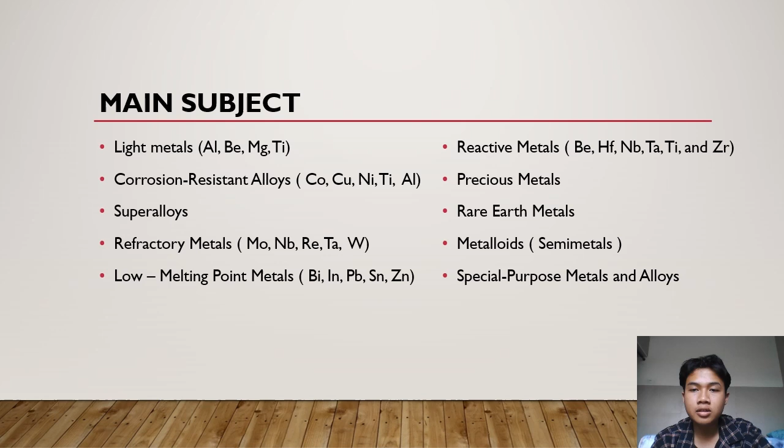So today I want to make a presentation. We will talk about metallurgy. In this chapter we will talk about non-ferrous metal, a variety of possibility. For the book reference, I use Metallurgy for the Non-Metallurgists, the second edition, edited by Arthur C. Reardon. For this main subject, we will talk about light metals, corrosion-resistant alloy, superalloy,

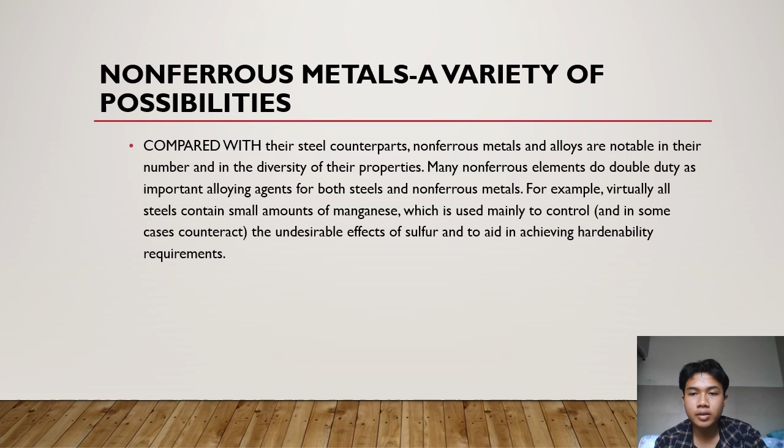refractory metals, low melting point metals, reactive metals, precious metals, rare earth metals, metalloids, and special purpose metal. So we talk about the non-ferrous metal, a variety of possibility. Compared with their steel counterpart, non-ferrous metal and alloy are notable in their number and in the diversity of their properties. Many non-ferrous elements do double duty as important alloying agents for both steel and non-ferrous metals. For example, virtually all steel contains a small amount of manganese, which is used mainly to control and in some cases counteract the undesirable effect of sulfur and to aid in achieving hardenability requirements.

So in the first chapter, we will talk about light metal such as aluminum, beryllium, magnesium, and titanium. High strength, lightweight alloys are of great importance in engineering applications for use in land, sea, air, and space transportation. One kilogram, or 2.2 pounds, of metal saved in the design and construction of such a system can result in important weight saving in power plants, transmission systems, and in total fuel requirement. There is a strong demand for high-strength, lightweight metal and alloy.

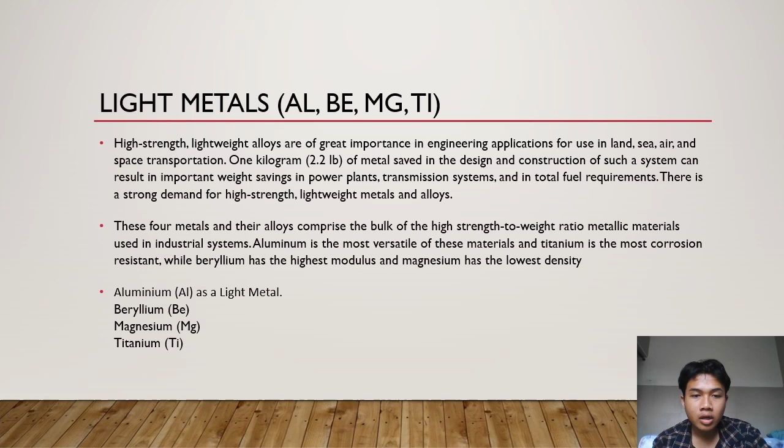So these four metals and their alloys comprise the bulk of the high strength to weight ratio metallic material used in industrial systems. Aluminium is the most versatile of these materials, and titanium is the most corrosion resistant, while beryllium has the highest modulus and magnesium has the lowest density. So these four metals include aluminium as a light metal, beryllium, magnesium, and titanium.

Aluminium has a density of only 2.7 grams per centimeter cubed, or 0.1 pound per inch cubed, resulting in a weight approximately one-third that of the same volume of steel, copper, or brass. Such a lightweight, coupled with the high strength of certain grades of aluminum alloy exceeding the strength of some structural steel, permits the design and construction of strong, lightweight structures. Aerospace structures are a primary example of this.

Beryllium is a high-strength, lightweight metal that is finding increasing use as a structural material in aerospace vehicles. The density of beryllium is only 1.85 grams per centimeter cubed, or 0.066 pound per inch cubed. This low density, coupled with high strength, gives beryllium an outstanding strength to weight ratio. Additionally, beryllium maintains its strength up to a temperature of approximately 1100 Fahrenheit.

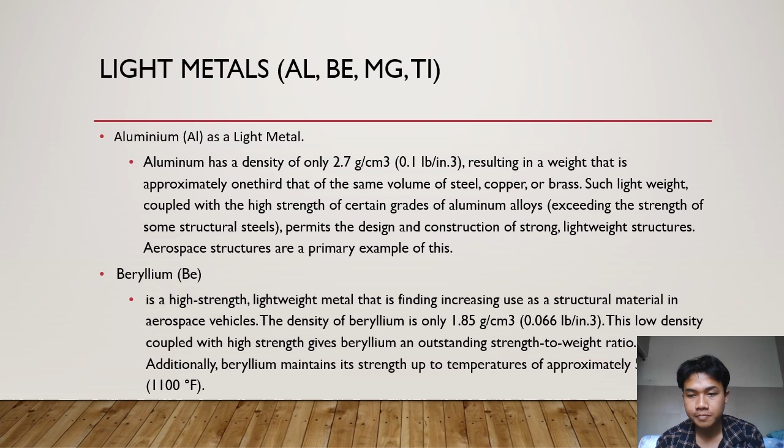So next we will talk about magnesium. It has long been recognized as the lightest structural metal. Structural applications include industrial, material handling, commercial, and aerospace equipment. In industrial machinery such as textile and printing machines, magnesium alloys are used for parts that operate at high speed and thus must be lightweight to minimize inertial force.

Last one is titanium, another low-density element, approximately 60% of the density of steel, that can be readily strengthened by alloying and deformation processing. Like steel, it is allotropic. Historically, titanium alloys have been used instead of iron or nickel alloy in aerospace applications because titanium saves weight in highly loaded components that operate at low to moderately elevated temperature.

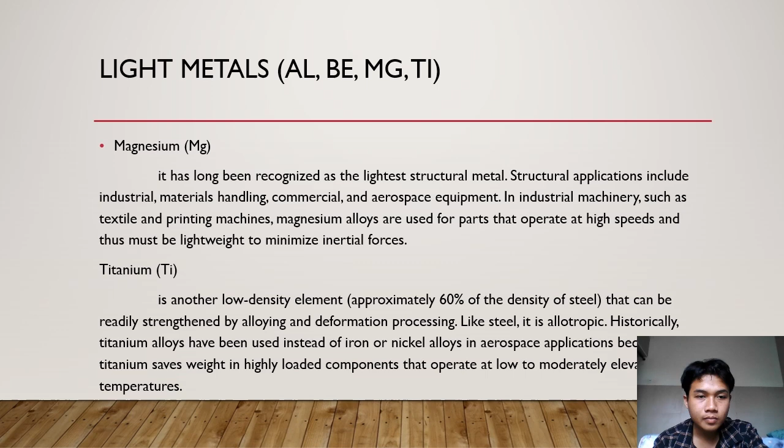So this is the table that has density and elastic modulus of important light metal. As you can see, magnesium has a density of 1.74 and a modulus of elasticity of 44.8. If you compare it with beryllium, it has a density of 1.85 and a modulus of elasticity of 303. So as you can see in this picture, you can compare it by yourself.

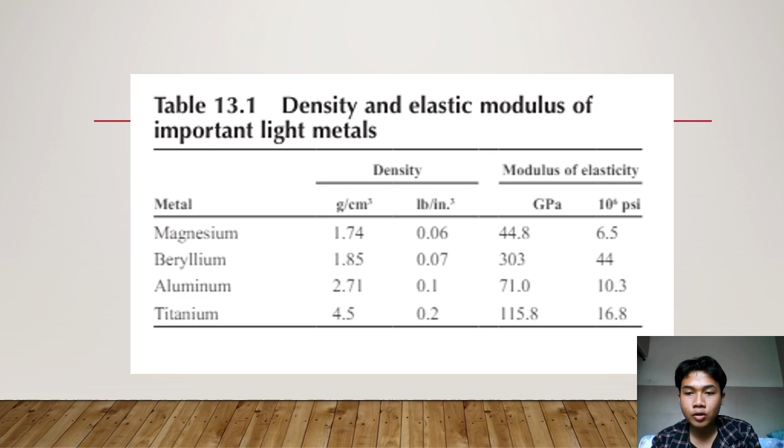Then let's talk about corrosion resistant alloy. Non-ferrous metal and alloy are widely used in corrosive environments. At one end of the spectrum, they are used for water piping and food preparation. At the other end, they are vital to the operation of many chemical plants dealing with aggressive acids and alkalis. There are two main reasons why non-ferrous metal are preferred over steel and stainless steel for many of these applications.

Variety of non-ferrous metals and alloys are well suited to this type of application due to their desirable physical and mechanical properties. For example, a high strength to weight ratio or high thermal and electrical conductivity may provide a distinct advantage over a ferrous alloy. Second, many of the non-ferrous metal and alloy possess much higher resistance to corrosion than available alloy steel and stainless steel grades. Four common non-ferrous metals used for their well-documented corrosion-resistant properties are copper, nickel, titanium, and aluminum.

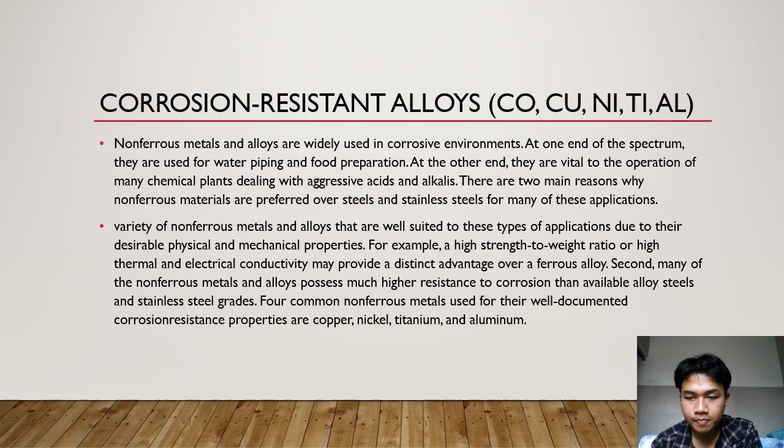We will talk about cobalt.

CoCrW and CoCrMo alloys were first investigated in the early 20th century by Elwood Haynes. He discovered the high strength and stainless nature of binary cobalt-chromium alloy and first patented cobalt-chromium alloy in 1907.

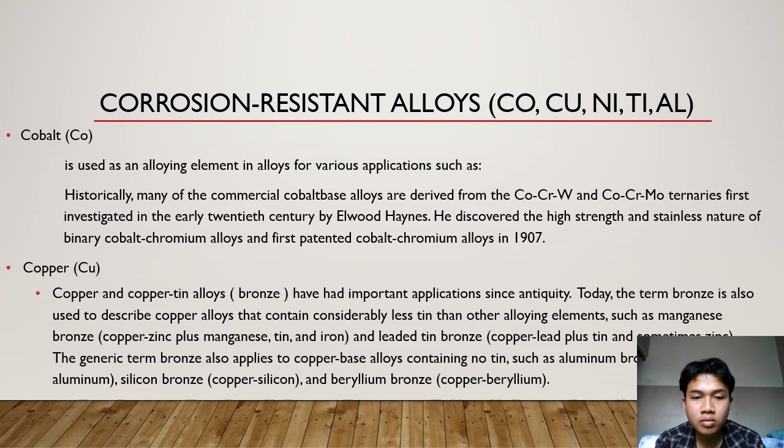Copper and tin alloy, or bronze, has had important applications since antiquity. The term bronze is also used to describe copper alloys that contain considerably less tin than other alloying elements, such as manganese bronze and leaded tin bronze. The generic term bronze also applies to copper-based alloys containing no tin, such as aluminum bronze, silicon bronze, and beryllium bronze.

Corrosion-resistant nickel alloys are very important to industries that deal with aggressive chemicals and high temperature conditions. Many of the nickel alloys designed to resist aqueous corrosion possess higher resistance to hydrochloric acid and chloride-induced phenomena, including pitting, crevice attack, and SCC, than stainless steel.

Nickel alloys are also among the few metallic materials able to cope with hot hydrofluoric acid. Titanium and its alloys are part of a larger family of materials known as reactive metals.

All of these reactive metals, notably titanium, zirconium, niobium, and tantalum, benefit from a highly protective oxide film. As a result, their corrosion rates are extremely low in many environments. The excellent corrosion resistance results from the formation of a very stable, continuous, highly adherent, and protective surface oxide film.

Aluminum is like titanium. Aluminum and its alloys are protected from many potentially corrosive environments by an oxide film that forms readily on freshly exposed surfaces. Aluminum has high resistance to corrosion in atmospheric environments, and in many industries, aluminum has especially good resistance to corrosion by weathering, due in large part to the formation of...

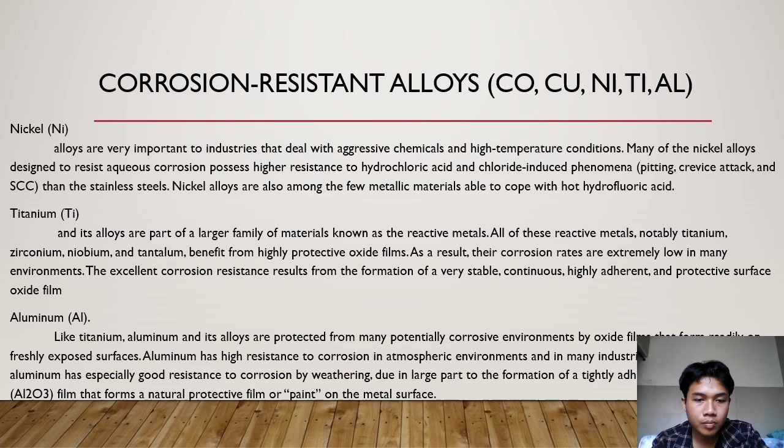...an aluminum oxide, Al2O3, film that forms a natural protective film or coating on the metal surface.

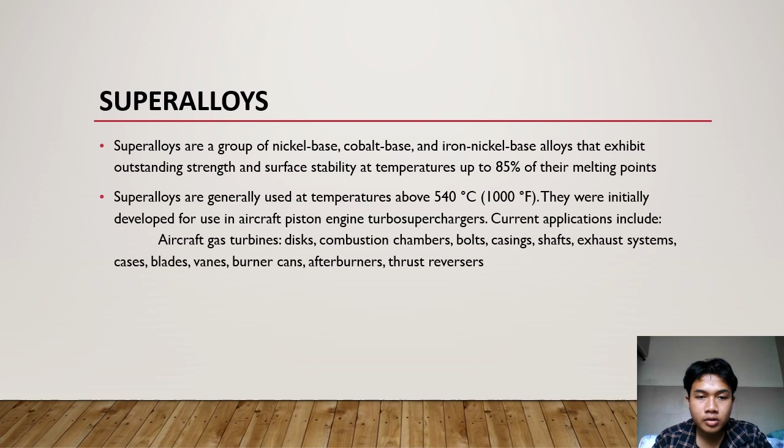bolt casing shafts, exhaust systems, turbine blades, vanes, burner cans, afterburners, and thrust reversers.

Nickel-based superalloys currently constitute over 50% of the weight of advanced aircraft engines. Turbine disk components are a major application.

Powder metallurgy processing of superalloys has proven to be a very repeatable and cost-effective method of production.

Cobalt superalloy: virtually all cobalt-based superalloys are alloyed with nickel in order to stabilize the FCC structure between room temperature and the solidus temperature of the alloy. Unlike other superalloys, cobalt-based alloys are not strengthened by coherent ordered

precipitates. Rather, they are characterized by solid solution strengthening of a austenitic FCC matrix in which a small quantity of carbide is distributed. Cast cobalt alloys rely on carbide strengthening to a much greater extent.

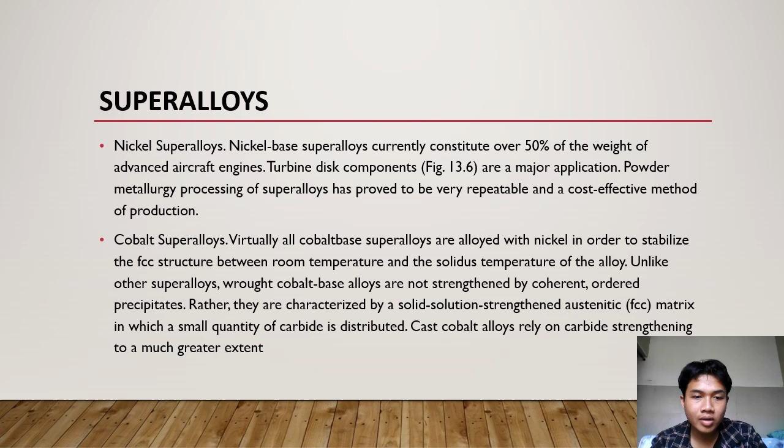Moving to the next chapter, we will talk about refractory metals. This family has 5 members, including niobium, also referred to as columbium, tantalum, molybdenum, tungsten, and rhenium. With the exception of 2 platinum group metals, osmium and iridium, refractory metals have the highest melting temperatures of all metals.

Molybdenum, or Mo, has a relatively high melting temperature of 2610 degrees Celsius, or 4730 degrees Fahrenheit, along with a high modulus, good creep strength, and retention of mechanical properties at high temperature.

Niobium, or Nb, in addition to its high melting point, is used for its combination of relatively light weight and retention of high strength at service temperatures ranging from 980 to 1205 degrees Celsius, or 1800 to

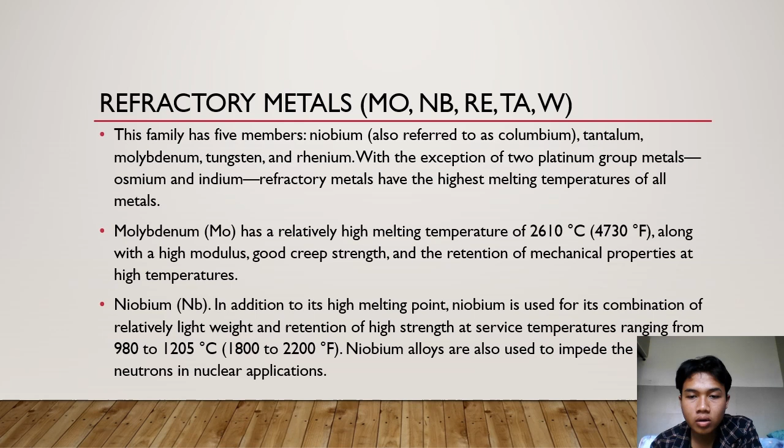2200 degrees Fahrenheit. Niobium alloys are also used to impede neutrons in nuclear applications.

Refractory metals: rhenium, or Re. The properties of rhenium are generally similar to those of molybdenum and tungsten. Its melting temperature of 3180 degrees Celsius, or 5756 degrees Fahrenheit, is the second highest among the refractory metals. Pure rhenium combines superior room temperature ductility with good high temperature strength.

Tantalum, or Ta, has a melting point of 2996 degrees Celsius, or 5425 degrees Fahrenheit, and high resistance to corrosion, including corrosion in body fluids.

The largest use for tantalum is as powder and in anodes for electronic capacitors, devices that store electrical charge when voltage is applied. Another important use is in prosthetic devices and surgical staples.

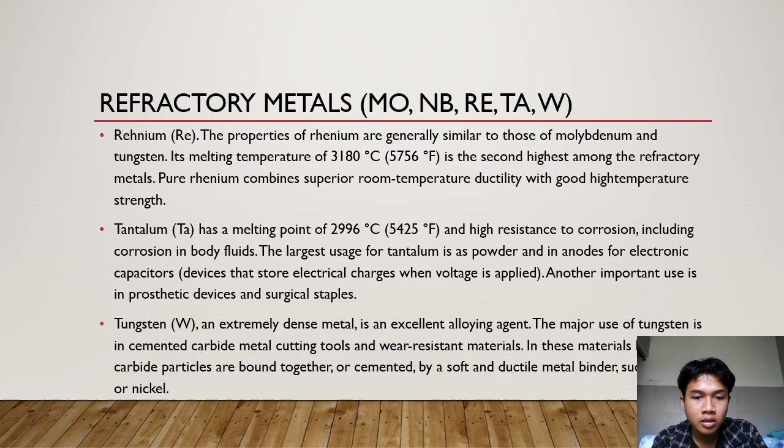Tungsten, an extremely dense metal, is an excellent alloying agent. The major use of tungsten is in cemented carbide, metal cutting tools, and wear-resistant materials. In this material, hard carbide particles are bound together, or cemented, by a soft and ductile metal binder, such as cobalt or nickel.

Low melting point metal: Bismuth is brittle, easy to cast, and not readily formed by standard working methods. Its melting point of 183 degrees Celsius, 360 degrees Fahrenheit, is lower than that of tin-lead solder.

Bismuth is one of the few metals to increase in volume upon solidification. It is diamagnetic, or slightly repelled by magnetic fields, and has a low capture cross-section for thermal neutrons.

Indium is one of the softest metals, easily scratched and highly plastic. It can be deformed in compression almost without limit. It melts at 156.2 degrees Celsius, or 313.1 degrees Fahrenheit, has low tensile strength and hardness, and is stable in dry air at room temperature. It is neither toxic nor a skin irritant.

Lead. The properties of lead: high density, low melting point, corrosion resistance, malleability, unusual electrical properties, and the ability to form useful alloys and chemical compounds, combined with a readily available form and relatively low cost, make it a unique material for many applications.

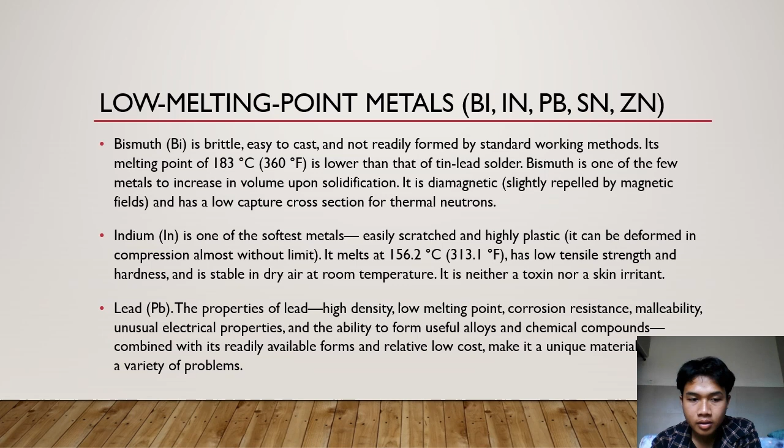Tin, one of the first metals known to humans, is non-toxic, soft and pliable, and suitable for cold rolling. Tin resists corrosion, making it an ideal coating for other metals.

Tin has a low coefficient of friction, and the addition of alloying elements such as copper, antimony, bismuth, cadmium, and silver increases its hardness. Representative uses include foil for wrapping food, wire, pipe, collapsible tubing for toothpaste, and cans. Alloys include pewter, a tin-based alloy containing antimony and silver, and bearing materials.

Zinc has a relatively low melting point of 419 degrees Celsius, or 787 Fahrenheit. It resists corrosion, is ductile and malleable, and is highly soluble in copper. As a coating, zinc provides corrosion protection for iron and steel. It is widely used in die-cast parts for autos, household appliances, computer equipment, and builder's hardware.

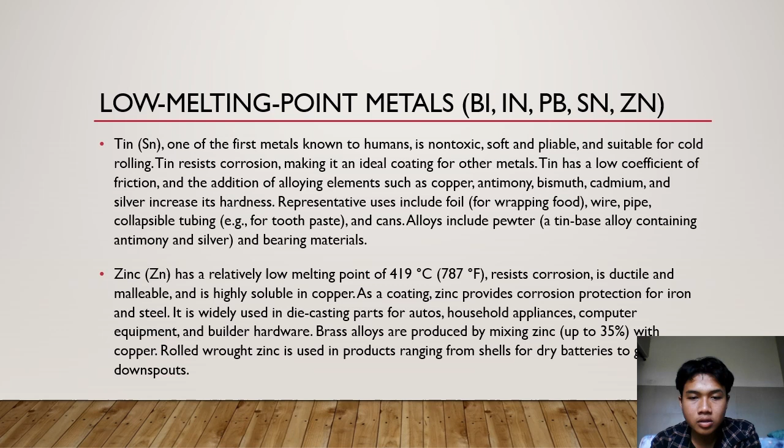Brass alloys are produced by mixing zinc up to 35% with copper. Rolled zinc is used in products ranging from shells for dry batteries to downspouts.

Reactive metal. Reactive metals readily combine with oxygen at elevated temperatures to form a very stable oxide. Reactive metals are extremely noble because of their passive film. However, they may become embrittled by the interstitial absorption of oxygen, hydrogen, and nitrogen.

Hydrofluoric, or HF, acid rapidly attacks reactive metals such as niobium, tantalum, zirconium, and titanium, either as pure or alloy metal. As low as 1 or 2% reactive metal in stainless steel or nickel alloy reduces their corrosion resistance to HF. Beryllium, titanium, niobium, tantalum, hafnium, and zirconium are considered reactive metals.

Of these metals, beryllium and titanium are low-density metals and are often used in alloys for light structural applications. As previously noted, niobium and tantalum have high melting points and are also classified as refractory metals.

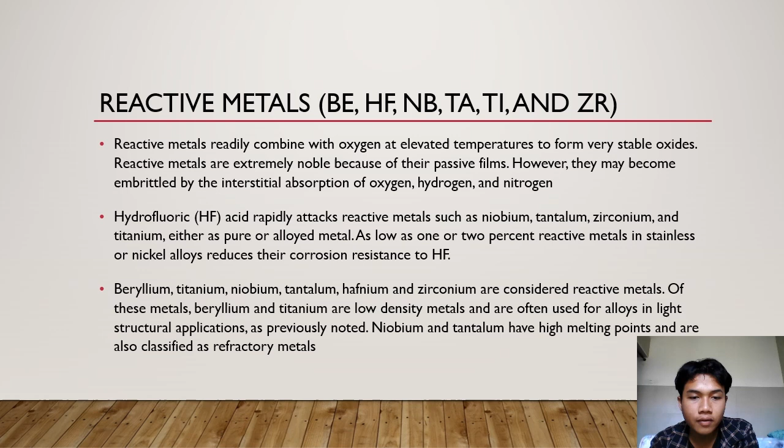Hafnium and zirconium are similar in terms of chemical properties, such as resistance to corrosion in nuclear environments and high strength. Nonetheless, there are two significant differences. Hafnium is not as ductile or easy to work, while the ductility of zirconium is similar to stainless steel and allows fabrication with common shop equipment.

Zirconium and hafnium are used in water-cooled nuclear reactors, but they serve different functions. Zirconium allows passage to thermal neutrons, while hafnium impedes their passage. Hafnium is also used in nuclear control rods as a neutron-absorbing material.

However, the greatest usage of hafnium is as an alloying element for superalloys. The primary application of zirconium is in the construction and operation of nuclear reactors, generally as cladding and as a structural element. The reactor grade must be free of hafnium because it absorbs thermal neutrons, while zirconium allows their passage.

Zirconium is used in chemical equipment and also in flash bulbs.

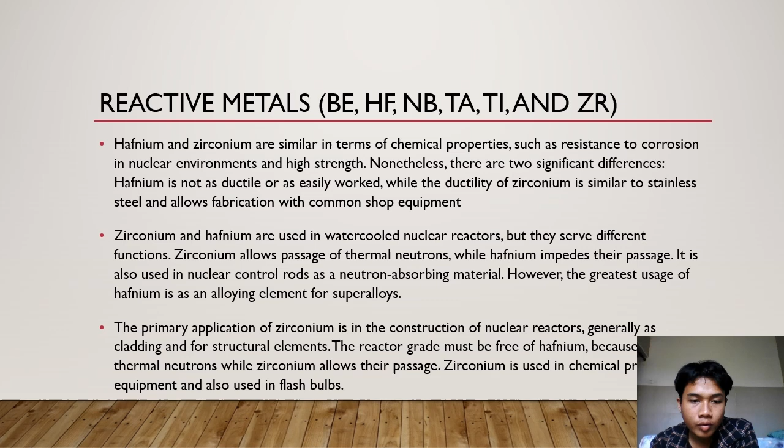Precious metal. Eight metals are in this family. Two of them, gold and silver, require little or no introduction. Not as well known are the six platinum group metals, which commonly occur together in nature: platinum, palladium, iridium, rhodium, ruthenium, and osmium.

Gold is extremely soft, ductile, and easy to deform. Chemically pure gold is 99.9% pure, and higher purity is commercially available. Silver and platinum group metals are expensive and scarce.

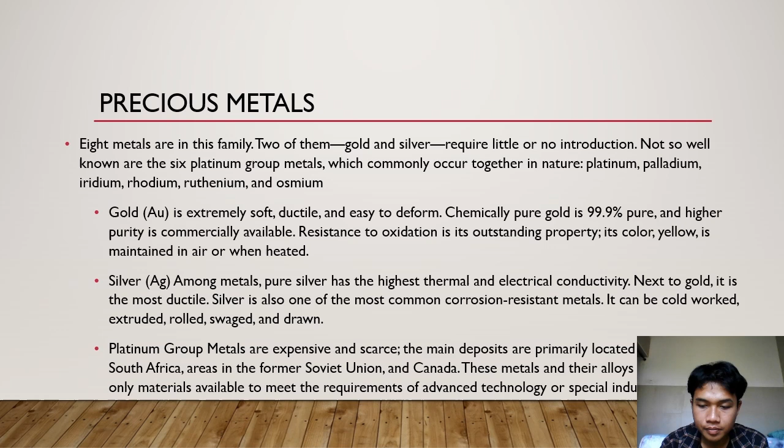Rare earth metal. 17 rare earths make up a closely related group of highly reactive metals: scandium, yttrium, lanthanum, cerium, praseodymium, and others.

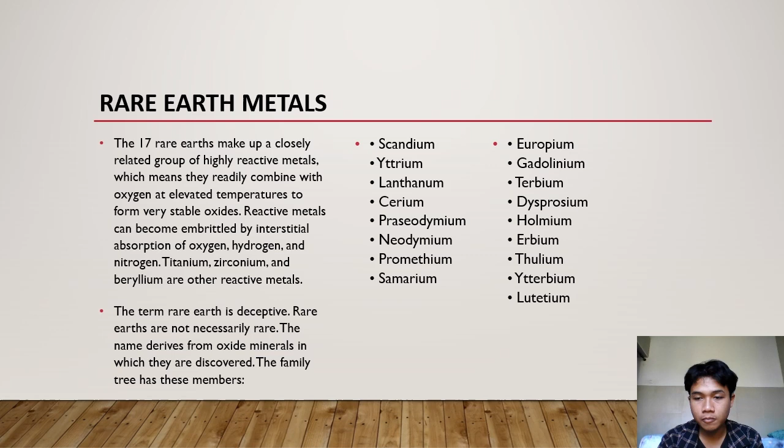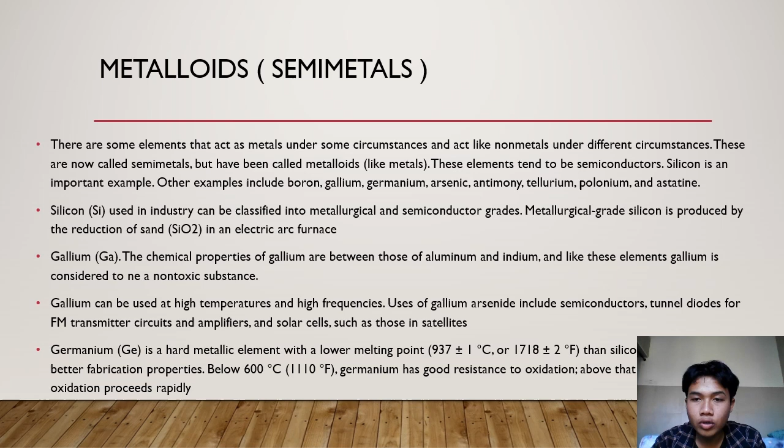Metalloid or semi-metal. These are elements that act like a metal under some circumstances and act like a non-metal under different circumstances. These are now called semi-metals, but have also been called metalloids. Like metal, these elements tend to be semiconductors. Silicon is an important example. Other examples include boron, gallium, germanium, arsenic, antimony, tellurium, polonium, and astatine.

Special purpose metal and alloy: uranium, vanadium. Magnetic materials are broadly classified into two groups with either hard or soft magnetic characteristics. Soft magnetic materials become magnetized by a relatively low strength magnetic field, and when the applied field is removed, they return to a state of relatively low magnetism.

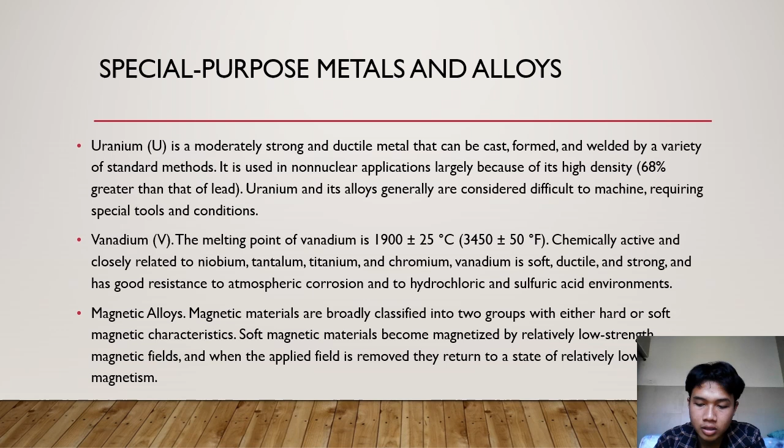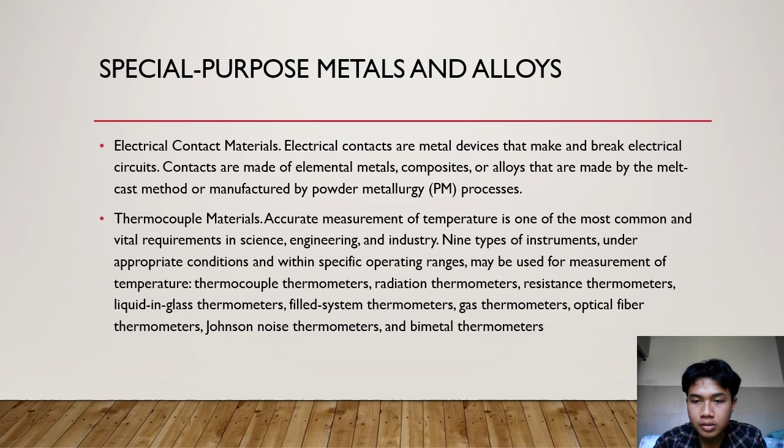Special purpose metal and alloy: electrical contact materials, thermocouple materials, low expansion alloys, shape memory alloys, fusible alloys. Okay, that's all for the special purpose metal alloys.